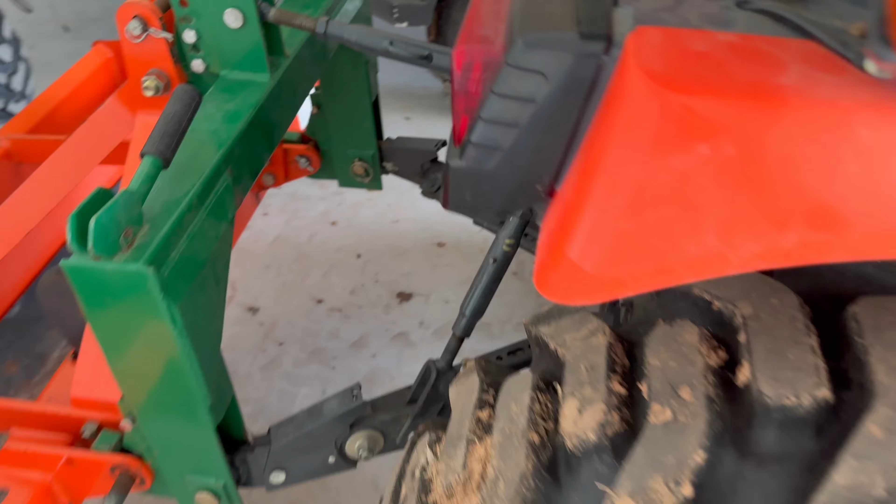Today we are working on the Kubota. This is the LX2610. It's a pretty common mod that we're doing today to these tractors. Basically, the hydraulic pressure from the factory has a range, and usually these Kubotas fall kind of on the bottom end of that range. So all we're going to do is bump up the hydraulic pressure a little bit.

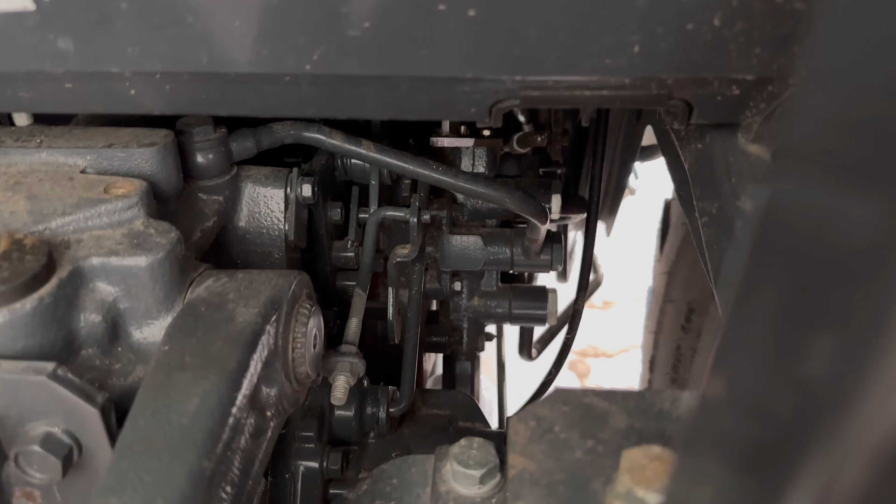I noticed my loader is pretty weak for this tractor. It just doesn't seem like it has really any power considering the size and weight of it. So we're gonna install a shim in this thing today. It goes into one of these back here. I'll have to look at the instructions and see which one. But let me go ahead and we'll put a gauge on the hydraulic line up here.

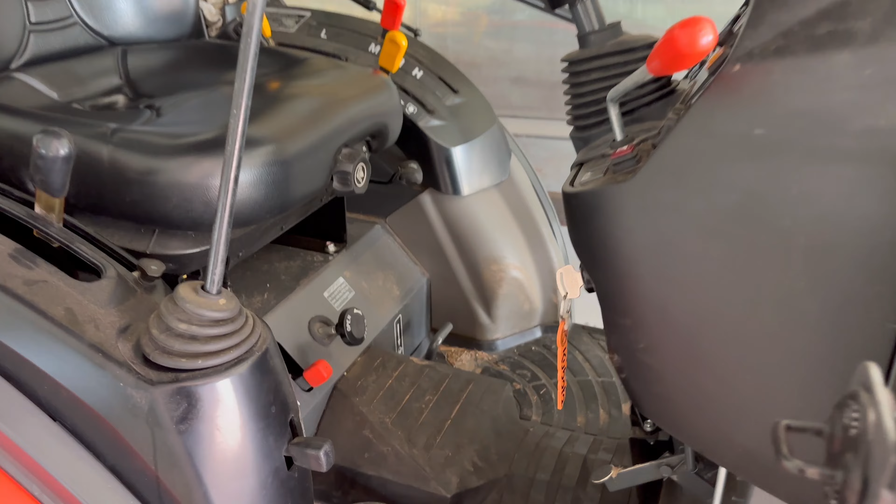So let's go ahead and start the tractor up, and we'll get the hydraulic up to operating temperature. This is probably about a 2-week cold start. It's not real cold out here today, but not a problem. So I'll go ahead and get this thing pulled out and we'll be ready to go.

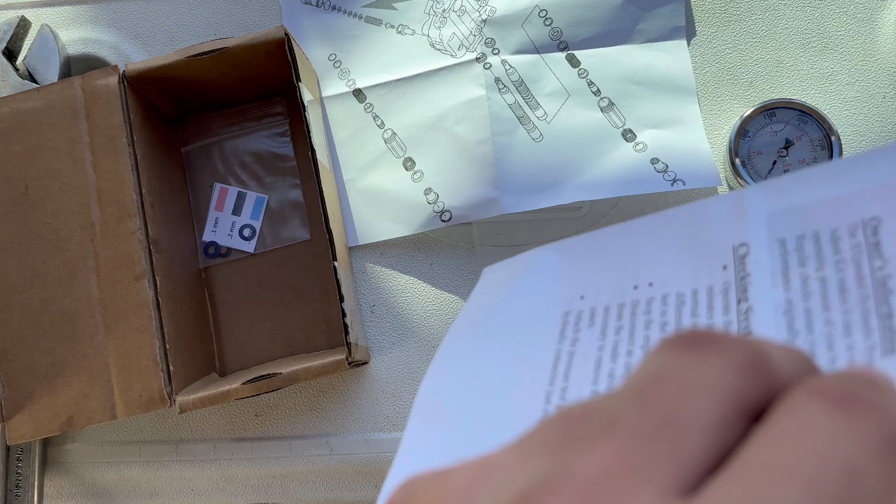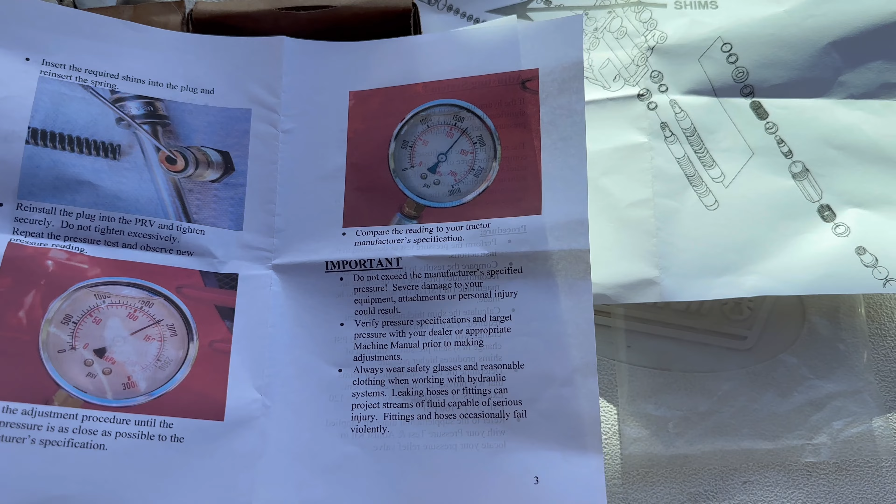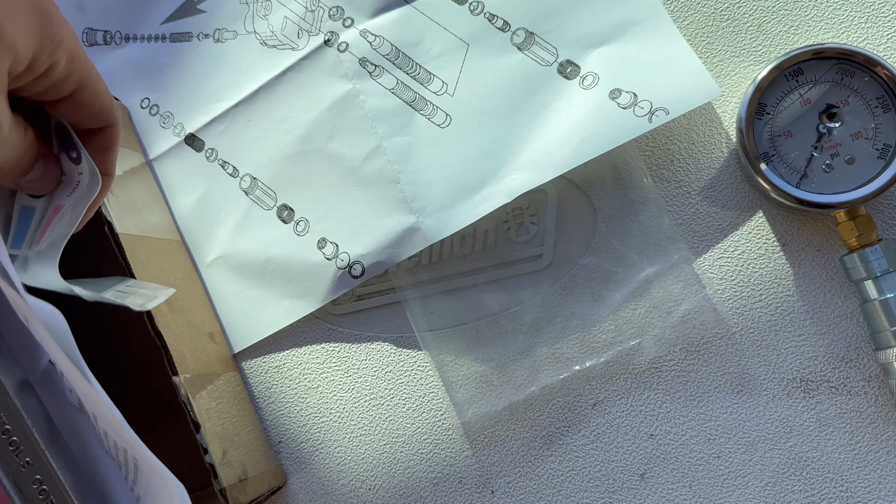All right, tractor is warmed up, and I ordered this kit from BXpanded, I don't know, something like that. Anyways, they have pretty good instructions here. So I believe my pressure recommendation on my machine is 2400 psi. And all you're doing is installing these little shims right here. These shims are really cheap. You can get these for like 50 cents a piece. But this kit was like $40 from them, and it comes with a nice gauge, which is what I wanted.

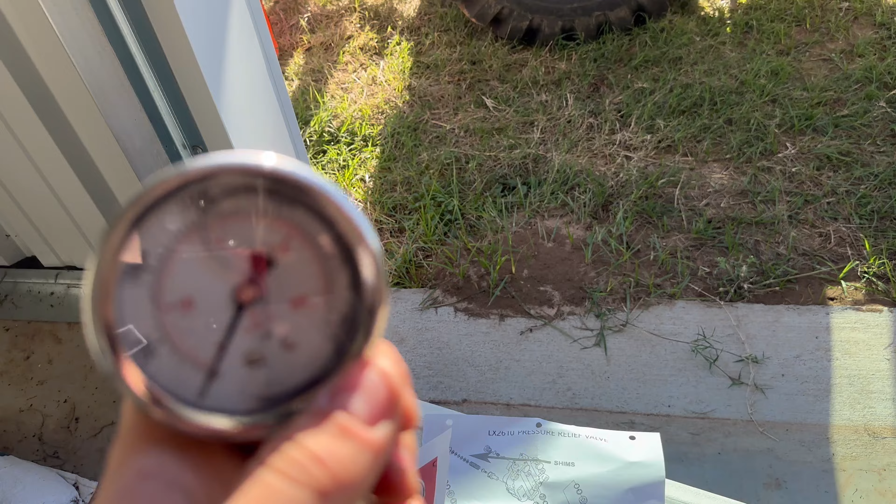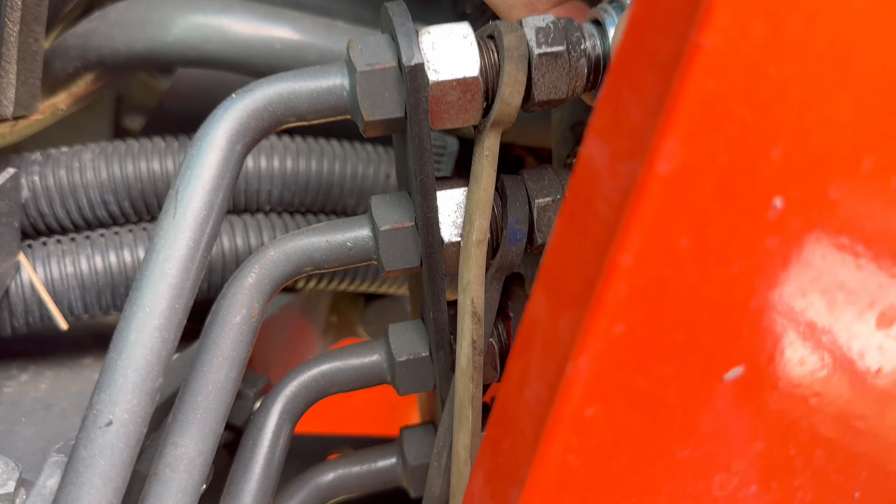It looks bad right now because of the water in it. But we're gonna go ahead and hook this up. It says on the instructions here to hook it up to the white port on the tractor's hydraulic for the loader. So we'll just go ahead and reach in there. And I did relieve these of pressure before I did that, of course. And whenever you order your kit from them, they'll ask you which model tractor you got, so you can get the proper gauge. So then the gauge should just pop right on there, just like that.

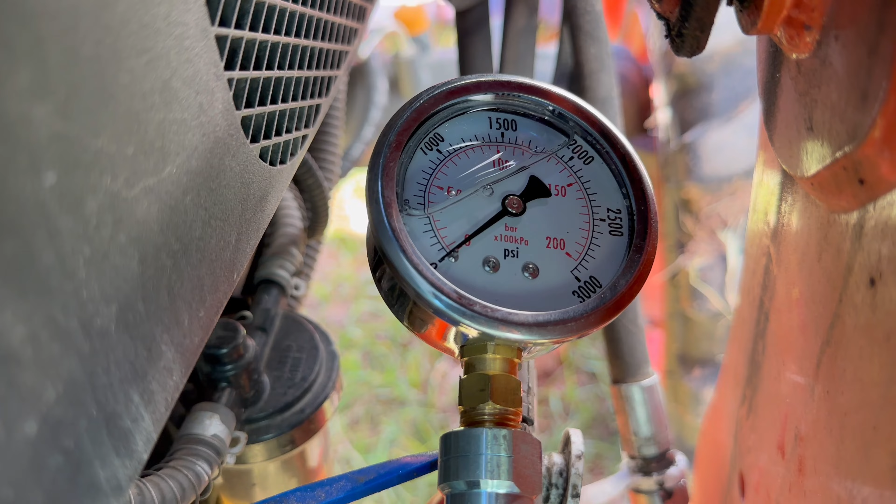Sweet. So we'll go ahead and let's see what we can get here. Sorry, the LX with the cab is not set up very good for getting the camera in there. That's okay. We'll go ahead and start her up, and we'll do these tests around 2000 RPM. Here you can kind of see the gauge fairly. There you go. Let's go ahead and start it up. About 2000 RPM.

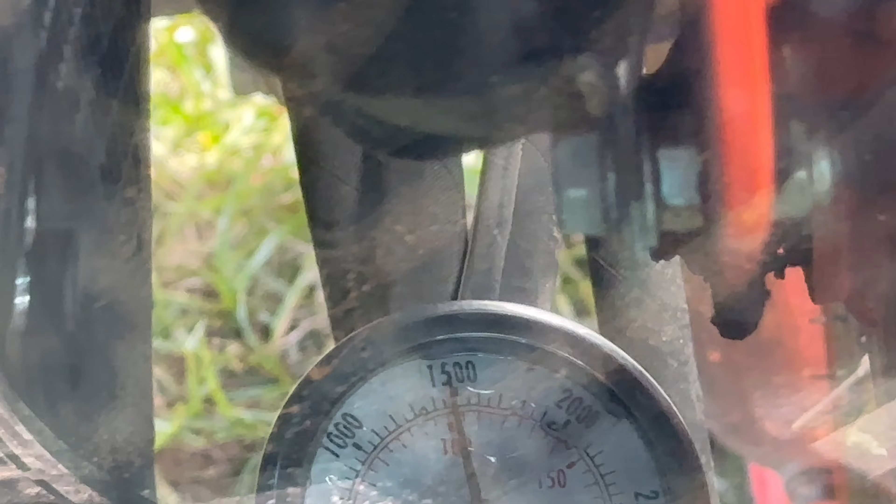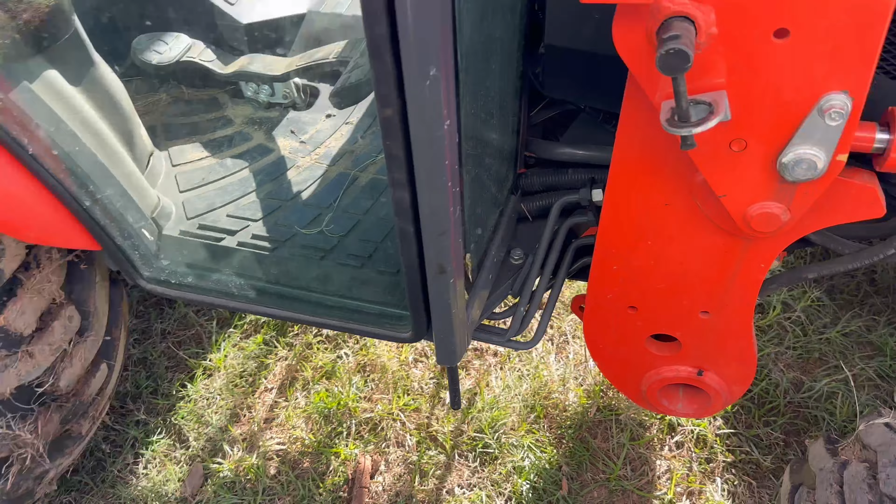So you see we're about 2200 PSI of pressure on my tractor. So I think we're gonna go ahead and bump that up a couple hundred PSI. So let's go ahead and see what the instructions say to do that. I'll be right back once I get this figured out.

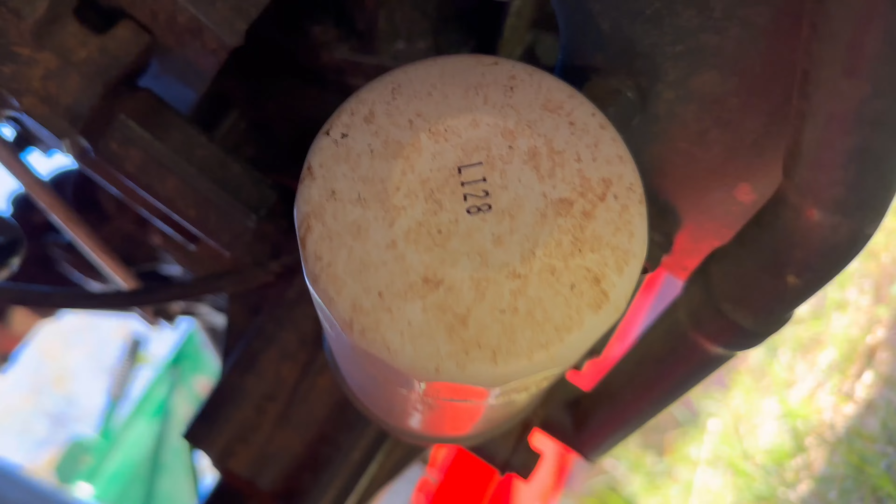All right, I think I figured it out for y'all. It's a 7/8. Of course it won't focus, but that's okay. So it's gonna be this one right here, in between these two lines. Right there. Sorry, I would take the wheel off for you, but I don't have a jack with me today. So we're gonna go ahead and remove that, and we'll see what comes out.

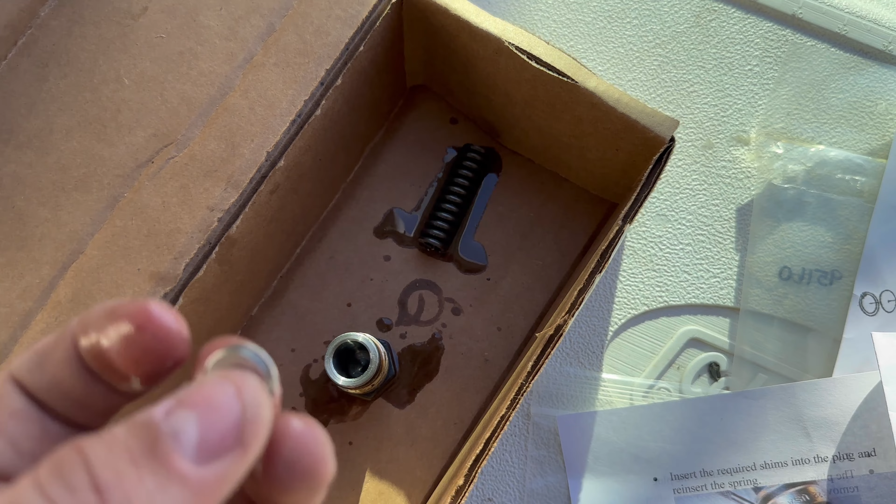All right, so we got it out here. These are the factory shims that fell out when I was tapping it. So we'll just go ahead and set those back down in there. And then the spring just goes on top of it like this. It's pretty easy to do.

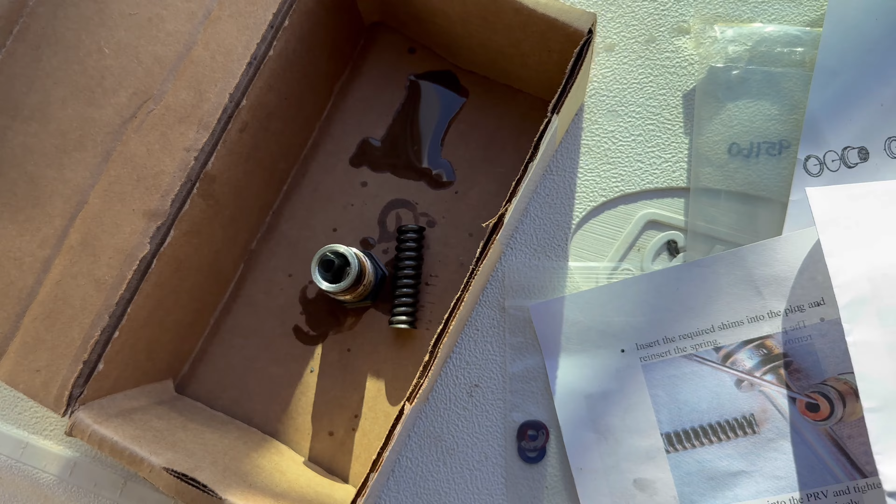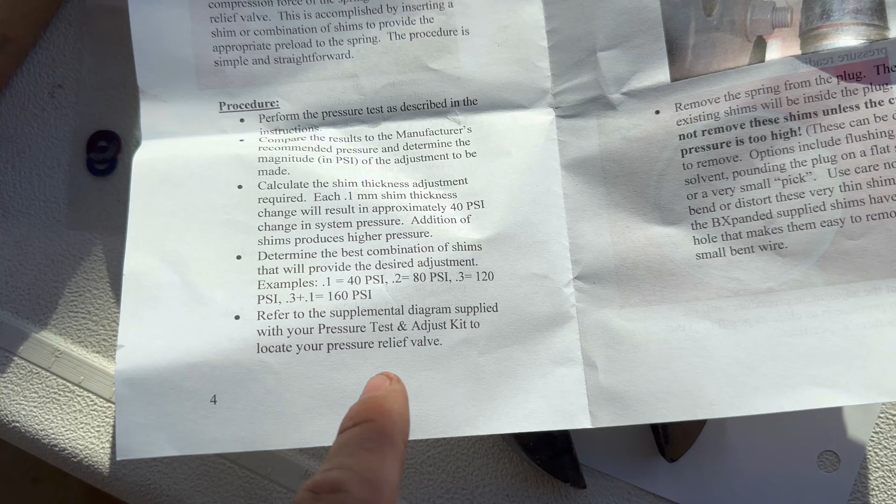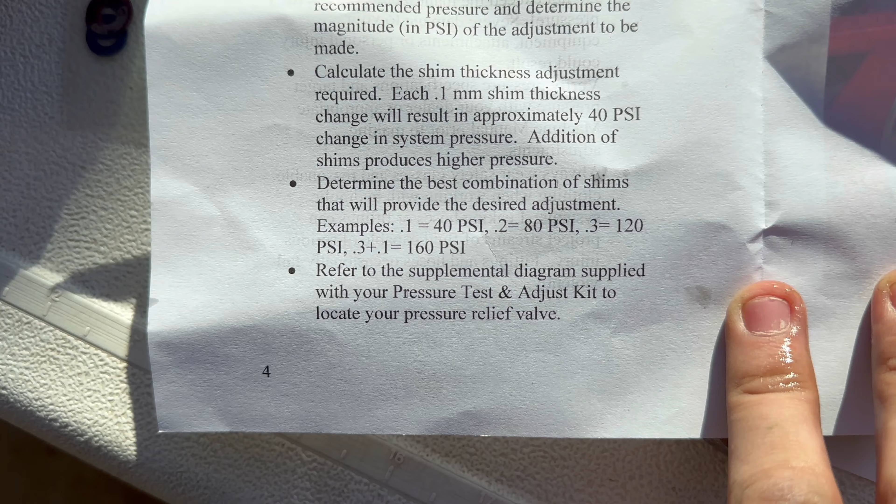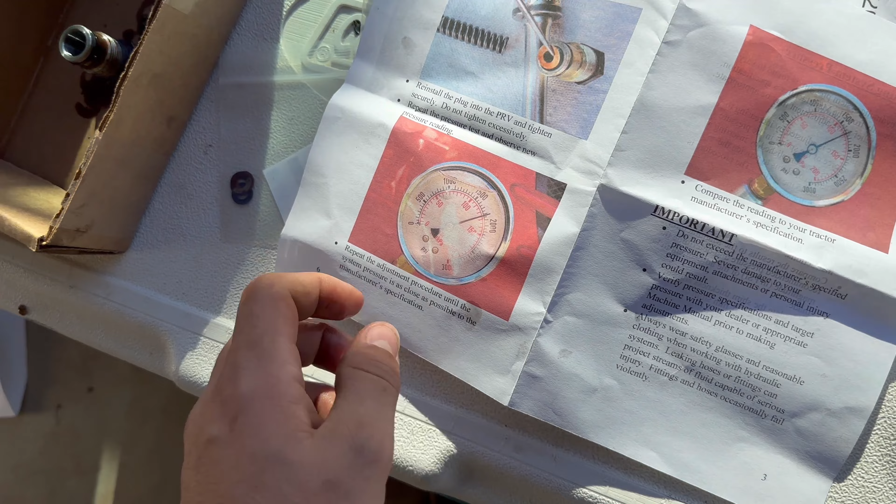So the instructions say that, I guess these are approximate, a 0.1 shim is 40 psi. So I'm gonna go ahead and do a 0.3 and a 0.2 one, which will be a black and a blue. So we're gonna go ahead and put that in there, and we'll give it a shot.

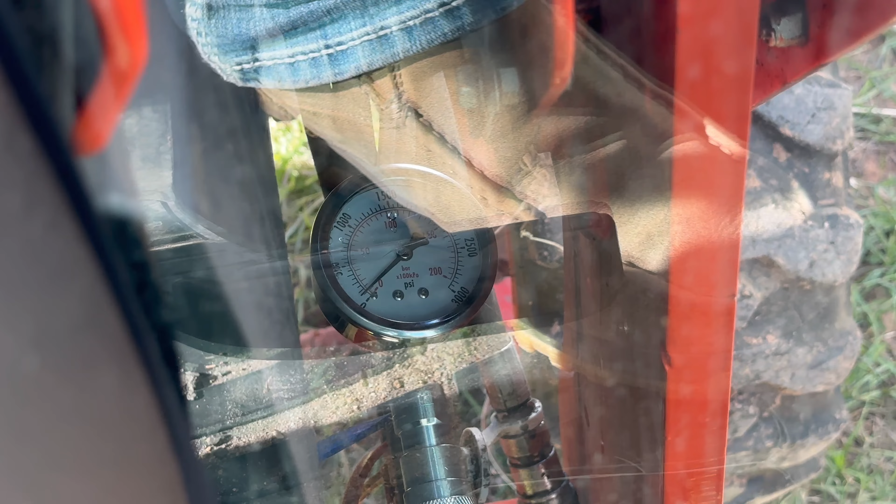All right, so I got the shim back in there. So we should have about 200 psi of extra pressure now. Let's see what happens. Sorry, the sun's glaring. We'll go ahead and start the tractor, trying to get y'all past this sun glare so you can see. Not working out though. All right, I'm gonna go ahead and do 2,000 RPM.

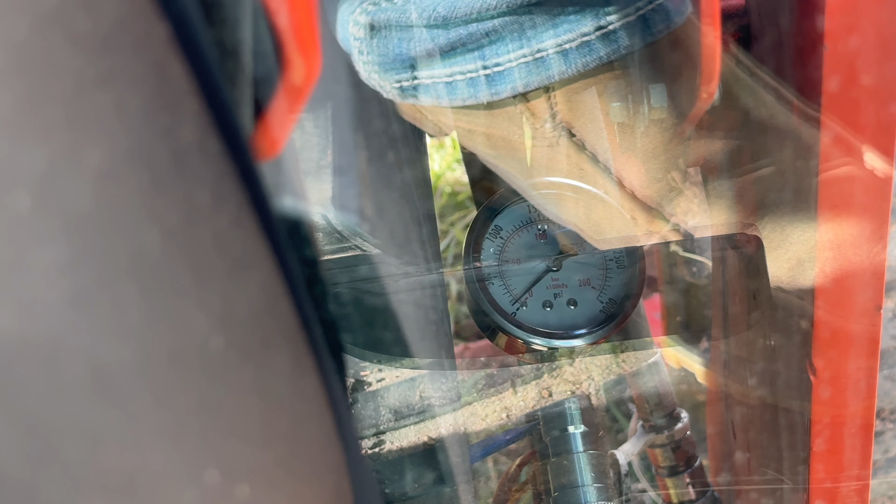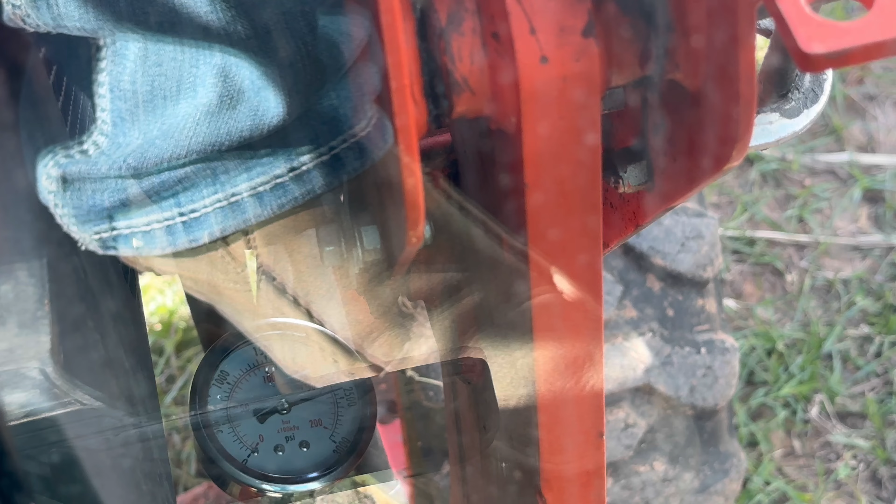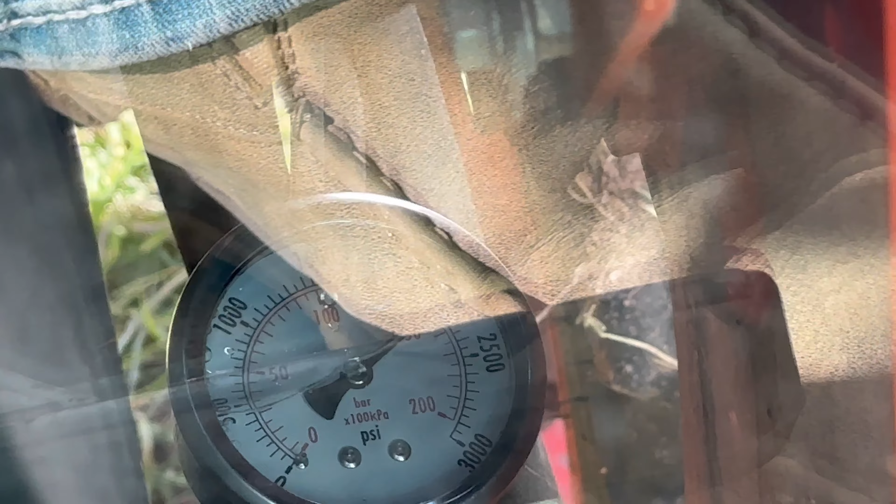Okay, that's perfect. So we're right at about 2,400. So the recommendation on the instructions was about correct, about 200 psi. So that's perfect. I'm happy with that right there. I'll hold on to those extra shims in case over time it wears and needs more. But that's a pretty easy mod to do. We'll see how performance goes with it.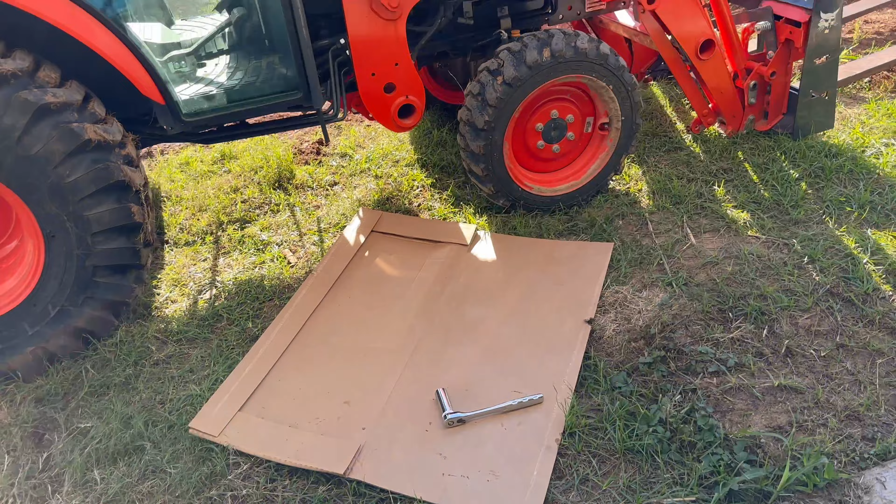For that drain bolt, it didn't leak that much hydraulic fluid. So I'm not even going to worry about refilling it. So I'll go ahead and take my pressure gauge off, and then we can get back to work with this thing. I'm excited to see if I can notice any difference.